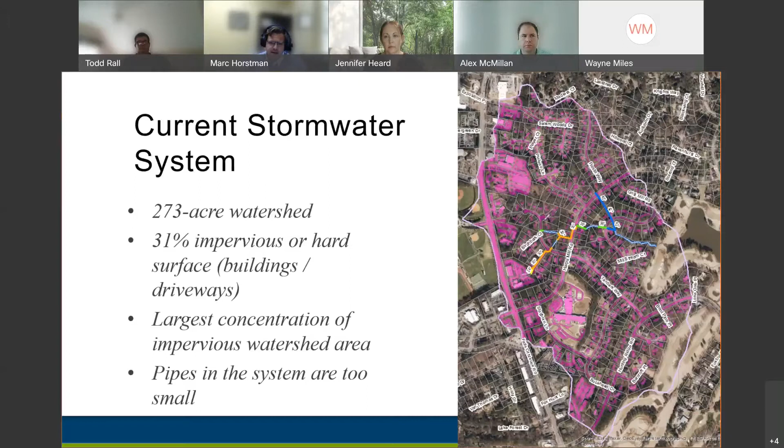So the first steps we took, and you might have seen this over the past couple of months, was we had a survey team that went out there and took survey elevations of the existing pipe system and the surrounding topography. So we had surveyors go and measure the pipe diameter, pipe type, and also channel width and channel depth, so we can understand how much water a channel can handle and feed into a pipe system, and how much water that pipe system can handle.

We've also surveyed the adjacent topography, so if the channel or pipe system can't handle that rainfall, we have a good idea of where that water will flow, and we'll feed that information into a hydraulic model.

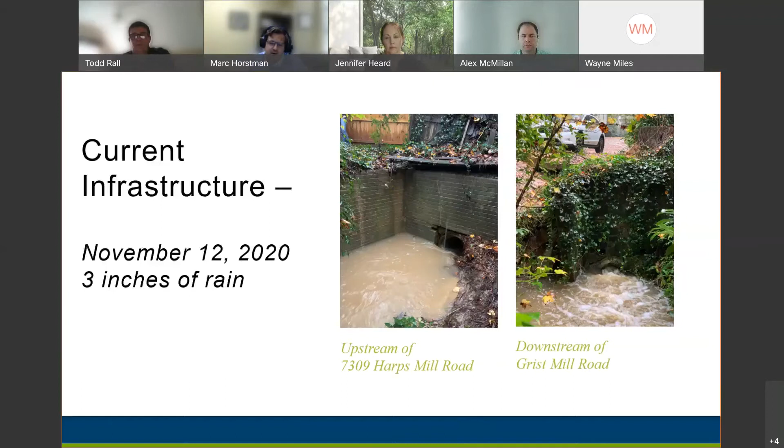So these pictures that we're looking at are from late last year, from November 12th, 2020, where we had about 3 inches of rain. And I think these pictures give a good idea of the amount of water and the amount of flow that we can see through this existing system with 3 inches of rain. And while 3 inches of rain is a lot of water, it's pretty common to get 3 inches of rain during a summer thunderstorm event.

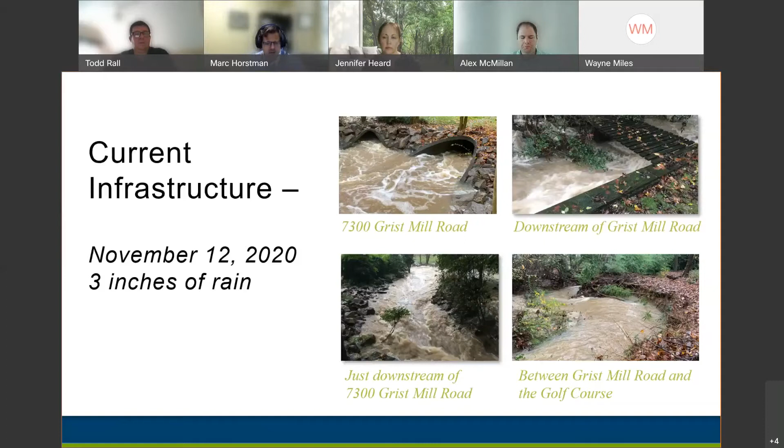So in order for our team to evaluate the effectiveness of the existing pipe system, we want to understand, when you have 3 inches of rain or higher, how does that flow interact and behave within the system? So we had these pictures that we looked at, where we have a good idea of what 3 inches of rain looks like.

However, we also want to know, what does flooding look like during a bigger storm event, such as what we call a 10-year storm event, or more specifically, a 10% annual chance event. So that is, statistically speaking, a 10% chance of this storm occurring in any given year. For the city of Raleigh, NOAA has determined that the 10% annual chance event is 5 inches of rainfall over a 24-hour period.

So we don't have an opportunity to see 5 inches of rainfall over a 24-hour period a lot. We have to put it into a mathematical model, or hydrologic and hydraulic model, for us to get an idea of what the extents of flooding are for this pipe system should we have 5 inches of rain.

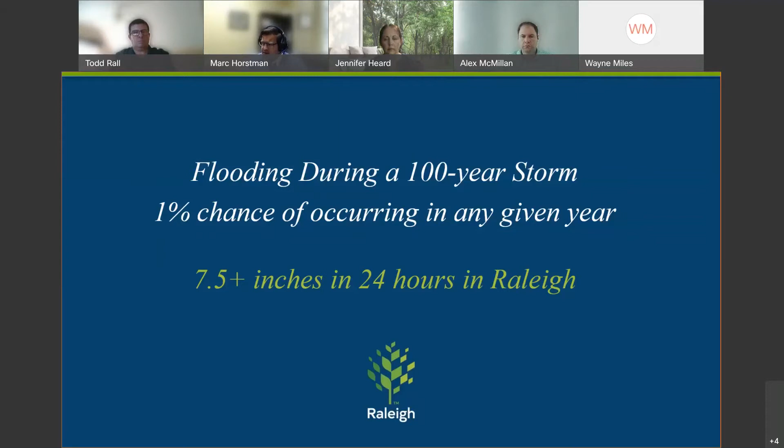So this is one of the things we're going to focus on, especially looking at Tanbark Road, and recognizing that there's several cul-de-sacs. We want to make sure that people have access, ingress and egress, who can get in and out of cul-de-sacs during flood events as well. So all the things we're considering as we are evaluating this existing system and looking for ways to improve it.

So zooming back into Harps Mill Road for the 1% annual chance event. Again, this is about 7.5 inches of rainfall. You can see that Harps Mill Road has quite a bit of flooding depth, about 2 feet, 24 inches of flooding on Harps Mill, which nobody would be able to drive through. In fact, I don't recommend anybody drive through any flooded water. And you can also see how homes such as at 7309 and 7312 on Harps Mill Road are impacted by flood depths during this large storm event.

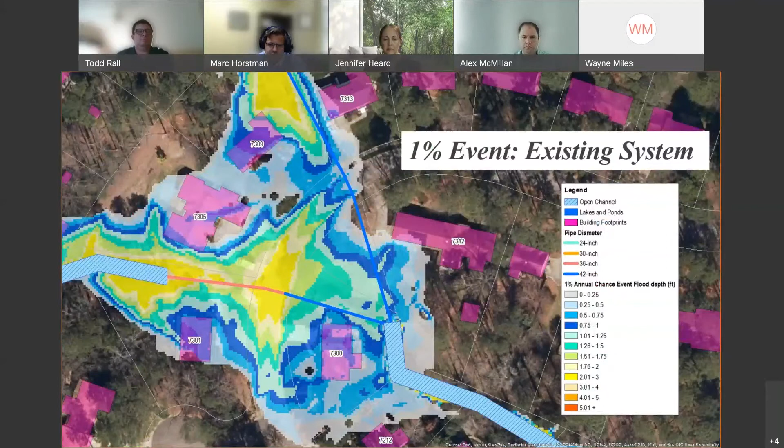Continuing downstream, we see again a similar story at Grist Mill Road. We're looking at about 2 feet of flooding on Grist Mill Road, and upstream of that, some of the adjacent homes, 7301, 7300, being impacted during this large storm event.

So I'm sure many folks on this call who have lived in the neighborhood can say, yeah, I have seen this type of flooding quite a bit. But this is a picture taken back on September 1st, 2013, long before we were considering wearing masks all the time. In fact, I remember the storm event when I was actually working for another consulting firm. I remember going out here and taking pictures back in 2013, September 1st, of the flooding.

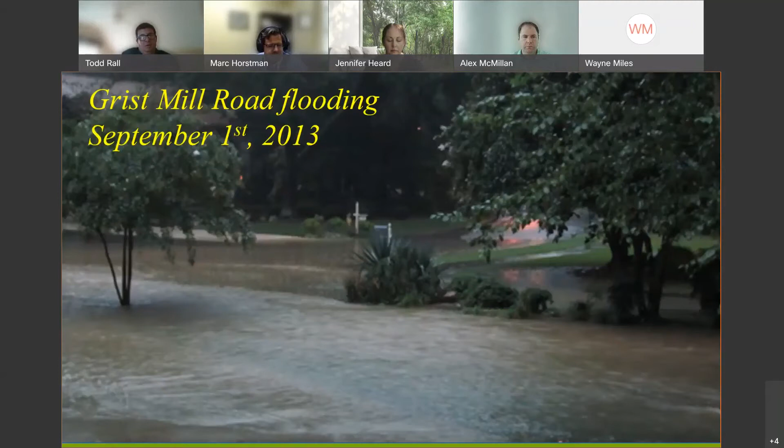We're looking at Grist Mill Road and looking at the flooding extents. So this is 7300 Grist Mill Road. And you can see how the water flows over the road and flows down to the channel. One of the things to note, which I thought was interesting, is you can see the driveway here at 7300 and the extent of water flooding.

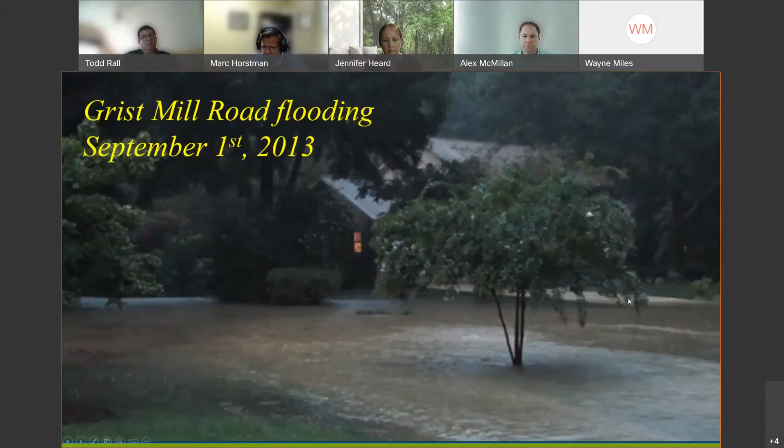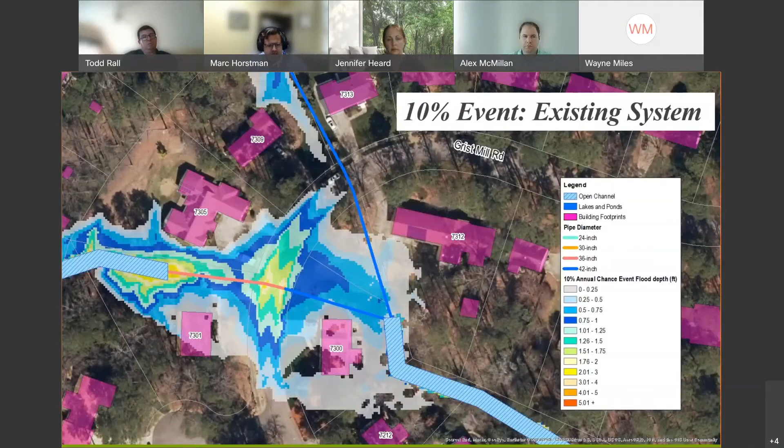So like I said, the first step was for us to understand, well, how does the existing system behave? So now that we have a good idea of how it behaves, we can start looking at ways to upsize the system or different types of improvements we can make to meet some of the city's goals and their design standards for improvement. So one of the first design goals is to provide what we call a 10-year level of service, and what that means is in a 10% annual chance event, we don't want any of the road crossings to flood.

And that is looking at Tanbark Way, Harps Mill Road, Grist Mill Road. So what does the pipe system and what does the storm drainage infrastructure need to look like? So when we do have a 10% annual chance event, we're not getting flooded water on the roadway, where people can still drive back and forth during a storm event.

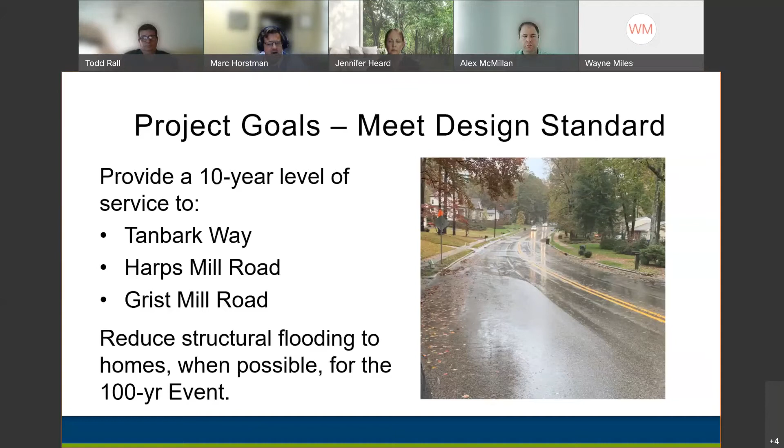One of the second design goals is to reduce structural flooding to homes when possible for the 100-year event, or for the 1% annual chance event, for that large storm event. We're going to keep that goal in mind to help reduce structural flooding wherever we can and when it's possible.

So with those design goals in mind, we have laid out some proposed improvements to the existing storm drainage system. A lot of these improvements are upsizing the existing pipe in its current alignment. But I will say that the proposed infrastructure that we're about to show through this presentation is based on preliminary modeling, and it is subject to change as the design development becomes finalized, as we walk through the next steps of easement acquisitions, public outreach, and get some more design information in play. So this right now is just the current direction that we're heading based upon our preliminary modeling.

So looking at this existing pipe system, starting downstream, we are looking at upsizing the existing 36-inch pipe, or existing 3-foot diameter pipe, and converting it to a box culvert. So near Gristmill Road, the box culvert would be about a 4x6 or 5x7, so a 4-foot high, 6-foot wide, or a 5-foot high, 7-foot wide box culvert. Up on the northern section, which is still under preliminary consideration, we're looking at upsizing the system from a 42-inch to a 54-inch pipe, so about 3.5-foot to about 4.5-foot diameter pipe.

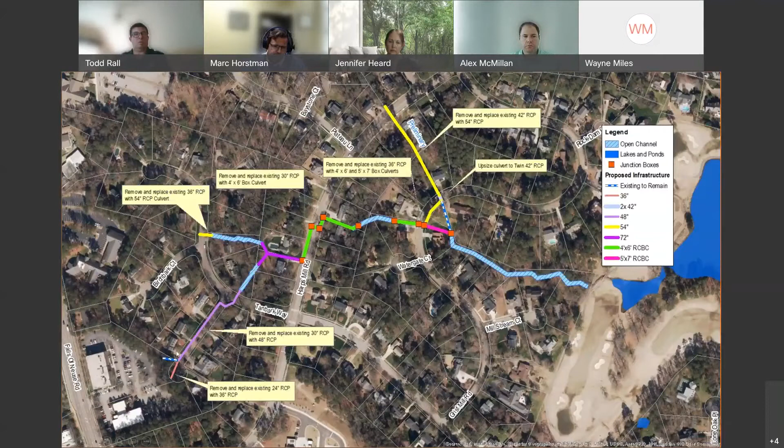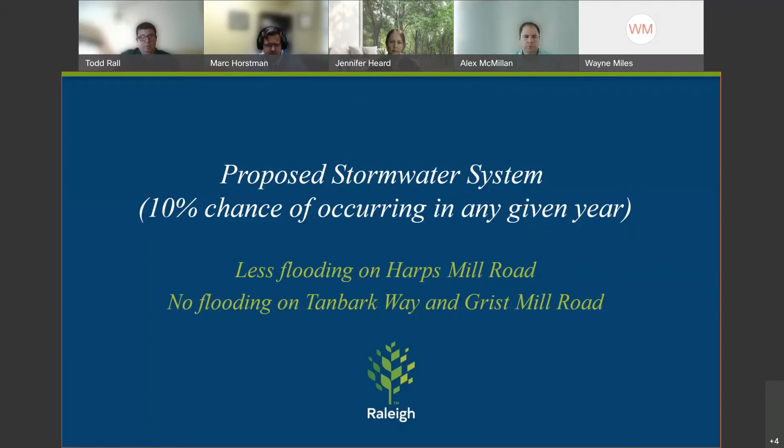So with these proposed improvements, we put those into the model as well to take a look at how well these proposed improvements meet the overall project goals. So looking at the 10% annual chance event, again, a 10% chance of this storm occurring in any given year, we do have reduced flooding in Harpsmill Road and no flooding on Tanbark and Gristmill Road.

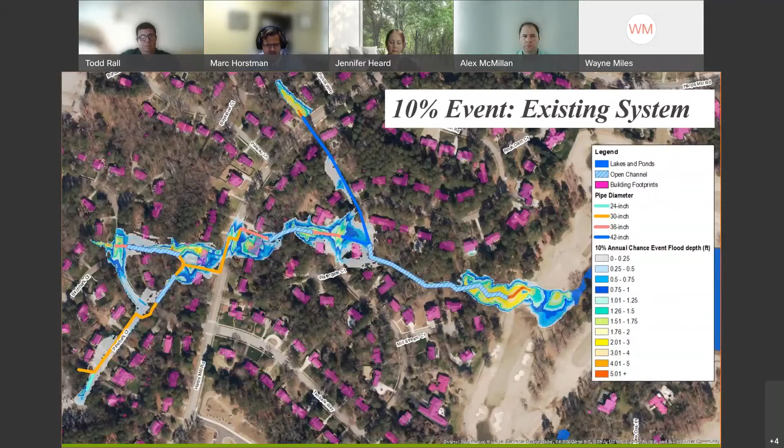So just as a reminder, this was the existing conditions system for the 10% annual chance event. With our proposed condition, you'll see that those heat maps, those flooding depths, have been eliminated on Harpsmill Road, Tanbark, and Gristmill Road, and on Pine Bark as well. So this proposed system does provide one of the city's objectives of providing a 10-year level of service on these main roadways.

And zooming into the Harpsmill Road pipe section, you'll see that with these proposed improvements, again, this is a 72-inch pipe going to a 4-foot high by 6-foot wide box culvert down Harpsmill Road. We no longer have substantial flooding or any type of flooding on Harpsmill for the 10% annual chance event. Just as a point of clarification, again, that's about 5 inches of rainfall. So if it rains about 6 inches of rainfall, then you probably will see flooding on Harpsmill Road, or especially for bigger storm events, you'll see flooding as well.

Again, moving downstream, the pipe system in here will be big enough to intercept and capture all the flow from the channel coming in from the northern section and through this western section into this Y. We are looking at taking the system and moving it on Gristmill Road to combine all the public infrastructure within the public right of way, and then continue it going back down to the channel. Again, showing that in a 10% annual chance event, this proposed pipe system does provide a 10-year level of service on Grist Mill Road.

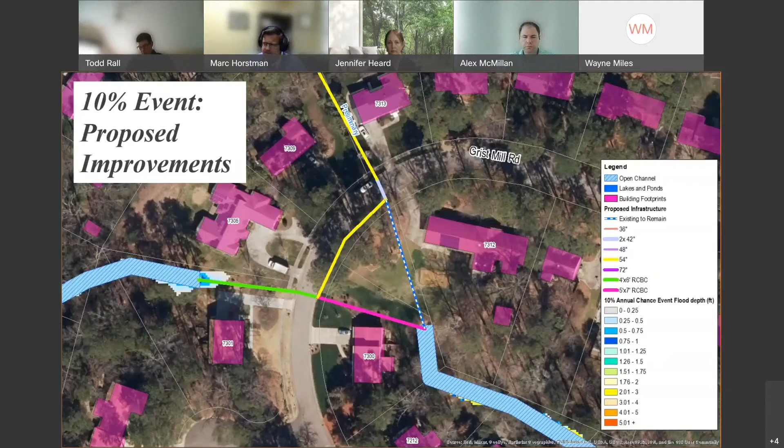Now, okay, that was one of the project objectives. The second project objective is, hey, hopefully we can reduce structural flooding as much as possible during a 100-year or a 1% annual chance event. One of the things you'll notice as we start working through these floodplain maps is that during one of these major storm events, we will still continue to experience flooding throughout the neighborhood. We can't design a pipe system big enough to drain the 100-year storm event.

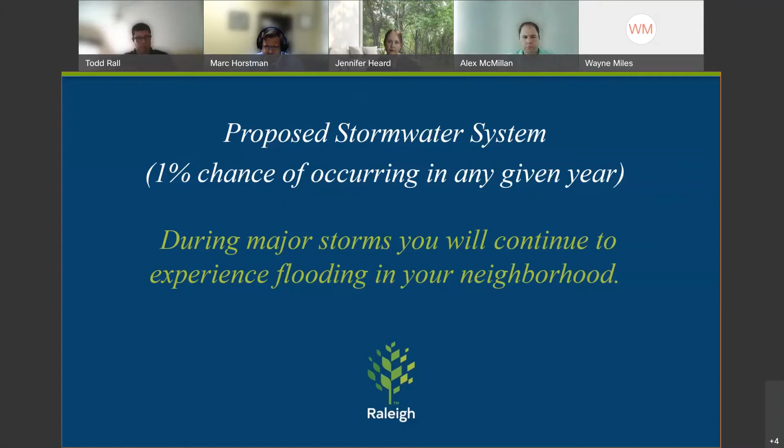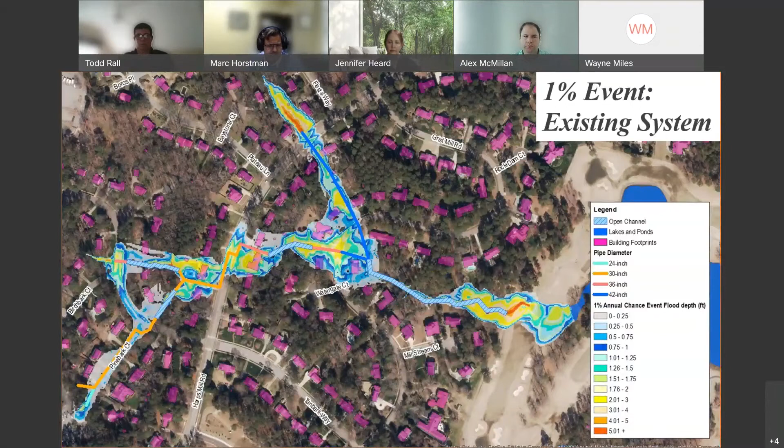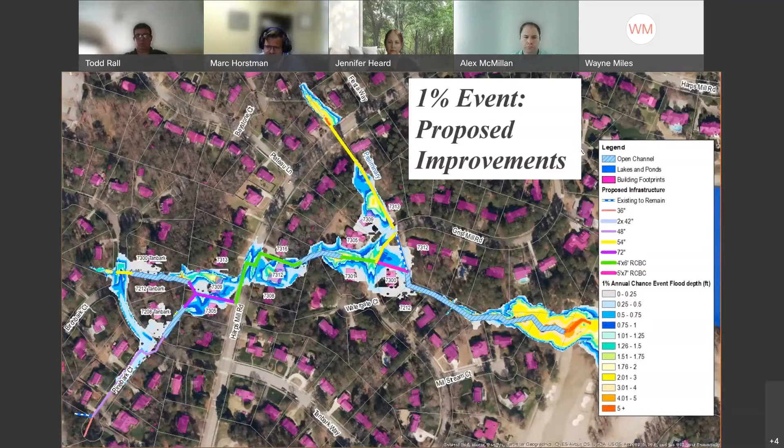So just as a reminder, here is the heat map or the flooding depth map that we were looking at for the existing conditions and the 1% annual chance event. Now, if we look at the proposed conditions, we still do see flooding, but the colors are no longer in the red and orange at the 5 or 4 or even 3-foot depths, but rather we see a lot more of the teal and the blues, ranging in flooding depths from about 1.5 foot all the way to about 2 to 3 inches.

Zooming into Harpsmill Road for the 1% annual chance event, we have reduced the amount of flooding in Harpsmill Road to about 12 inches. However, we will still expect to see flooding through the system in a 1% annual chance event. You'll also notice that we still see overland flooding in one of these large storm events. Even with this upsizing of the pipe system, we still see overland flooding occurring at 7309 and 7312 Grist Mill Road for these large storm events.

I will note that the city recognizes that these homes will be impacted by these flooding events and will work with the property owners if they wish to sell or give part of the property to the city. That's a conversation that can happen with the city.

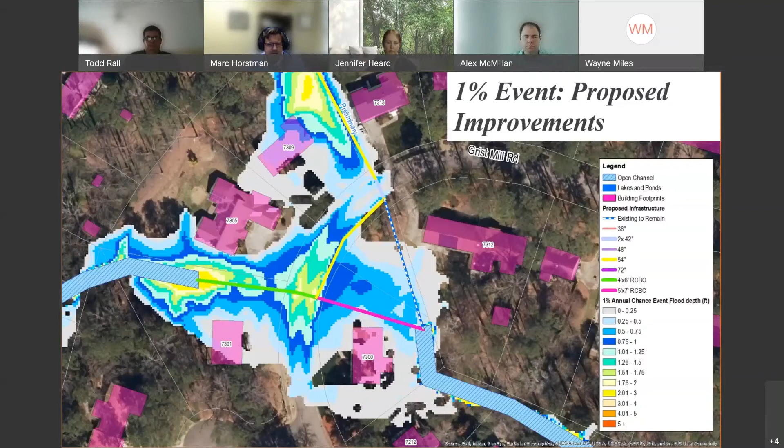Todd, in his introduction, did mention some of the schedule. I will just kind of review what we have completed to date. Over the past couple months, you've probably seen a survey team out taking surveys of the existing pipe system and topography that allowed us to generate the maps that we just looked at.

In addition to the survey team, we also had a geotechnical team. So you might have seen a drill rig out on Harpsmill Road. We needed to perform a geotechnical investigation to make sure that the pipe system would not be hitting bedrock. If we have to put a pipe system in bedrock, it becomes very expensive and very difficult to do. Luckily, most of the proposed pipe system is above the measured bedrock. And this past month, we have been working on the modeling results and generating the maps and the preliminary alignments that we're talking about today.

Some of the next steps you can be expecting for this project is community outreach. Todd and I definitely want to reach out to impacted property owners, review and discuss with property owners this proposed alignment, proposed pipe system, and proposed improvements that we can see in the properties, and make changes as needed based upon this public outreach and input property owners have. We'll take the opportunity to finalize the model and the design plans.

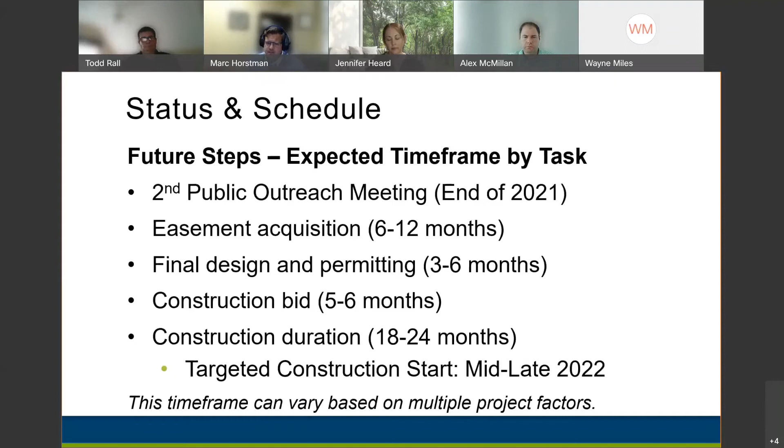So I want to take an opportunity to talk about what people can expect during construction in a residential area. While construction is at the end of 2022, it's always helpful to start getting an idea of what type of impacts people will be experiencing to install these proposed improvements. The pictures we're going to walk through are actually local pictures from City of Raleigh projects close to Western Northridge that are showing different components of what to expect.

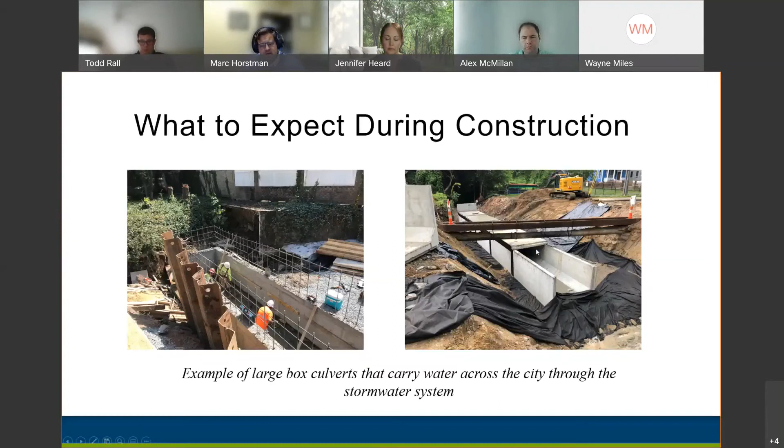In addition to putting in box culverts, we'll also have to put in head walls. And due to the size of these head walls, especially if we're putting in box culvert or 72-inch head walls, we're going to have to put these in cast in place. We'll have to frame up, put in rebar, pour concrete, and let it cure.

And of course, since we're working in a residential area and some of our pipe alignments are going between homes, we will have situations where we'll have excavators and construction right up near the edge of homes. We'll do what we can to make it clear to the contractors and outline it in the plans that they'll have to protect all the existing infrastructure and existing homes, even in some cases where we have to put in foundation protection if we're digging next to home foundations.

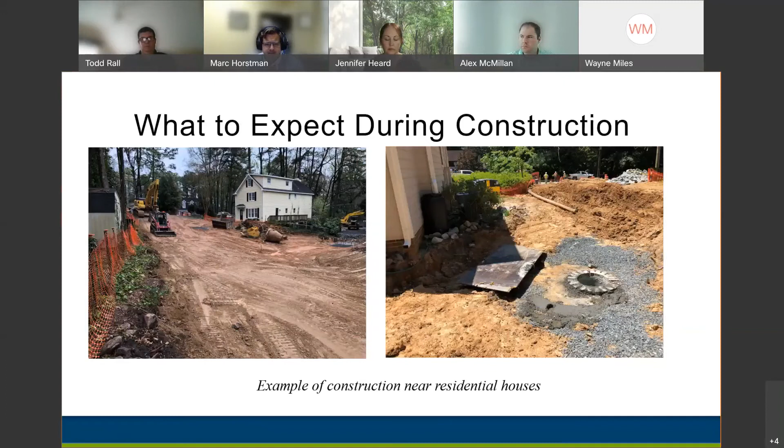So to kind of recap, the next steps: Todd and I are going to reach out for individual property coordination to review our proposed alignment. And we're going to start working on the final design development and start the process of requesting property and easement acquisitions so we can have the necessary easements in place for temporary construction easements, with permanent drainage easements, so that we can work towards the ultimate construction date.

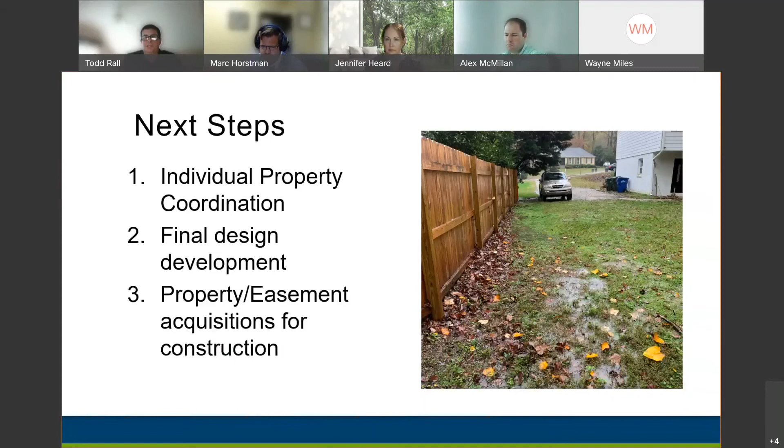Do we have any other questions? Mr. Delbert Gay: would you please explain the general size and type of pipe that will be used on 7208 Tanbark Way? Thanks. Marc, do you want to address pipe type and size along Tanbark? I will. Give me 1 second to flip to Tanbark. What was that address again? It was 7208 Tanbark.

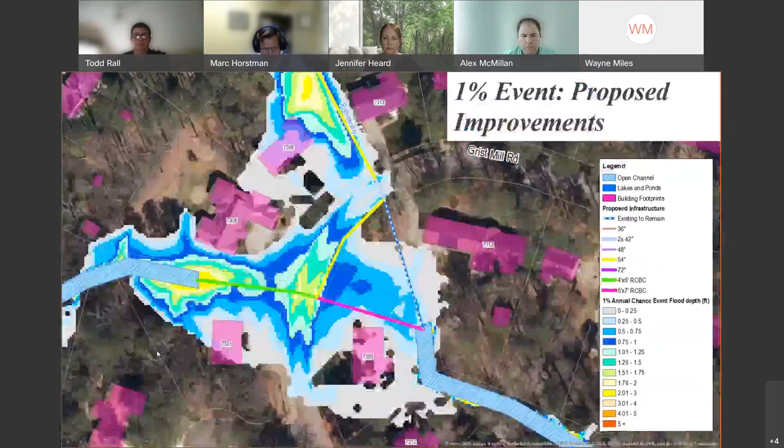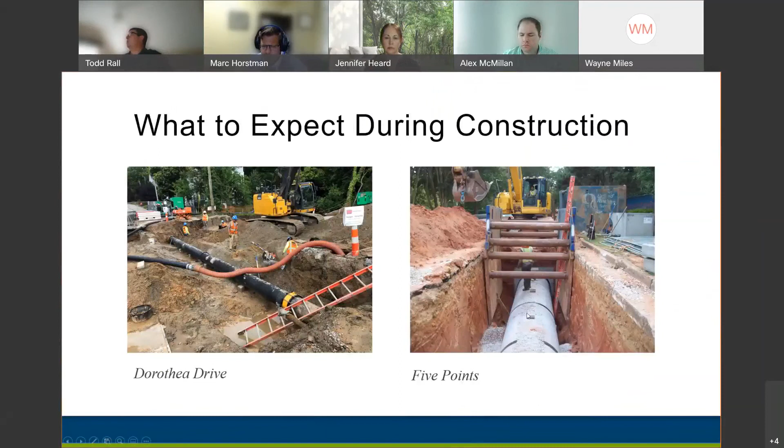Yes, right now, the proposed plan is to have a 4-foot diameter concrete pipe. So just as a point of perspective, this is a good picture if you want to think about a 4-foot diameter concrete pipe being installed within the roadway. That is going to be near the intersection of Pine Bark and Tan Bark. So that's going to be collecting a 4-foot diameter pipe going up Pine Bark to collect a lot of this flow, and then going across Tan Bark and emptying out into this channel. And then downstream of this channel, we're looking at putting right now a 72-inch, which is a 6-foot diameter concrete pipe. So hopefully I answered that pipe size and type question.

Todd, are you muted?

A question from Carol Ann Willingham: how is the proposed commercial development at Falls of Neuse and Harps Mill expected to impact the project? Marc, I believe you've looked at that. We have, yes. So the proposed development will have to satisfy the city's stormwater requirements for new development, which is pre and post control. So with those developments coming in, if they are keeping the same amount of impervious percentages, that would be the equivalent amount of runoff volume that we are seeing today. So we're not expecting a major change within the overall hydrology as a result of that development.

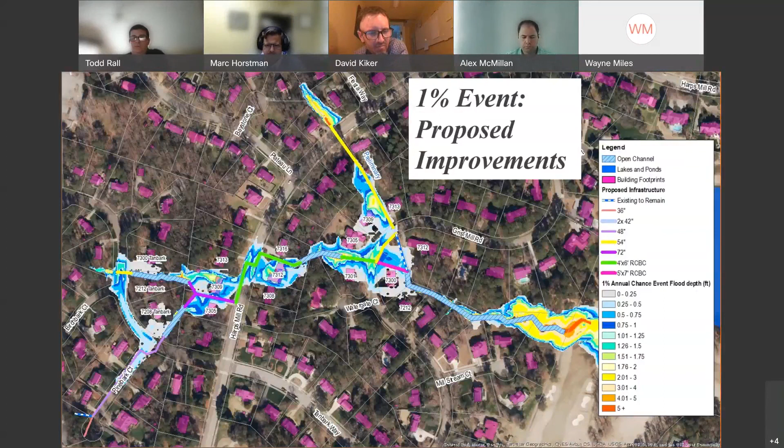Thanks again, Marc. Any other questions concerning the project? We've had some good questions thus far. Thank you for those. I hate to sound like an auctioneer, going once, going twice, going 2.5 times. All right, that's 3.

I guess in closing, I just want to drive home this part of the project that can really impact when we start construction. And that's the easement acquisition part of the project. We really ask that you carefully consider your options with those easements and expedite your end of the process in order for us to get the easements that we need. Simply losing one easement could potentially mean we can't do the project. So we're really going to try and get everything that we need well ahead of time from when we plan to start construction.